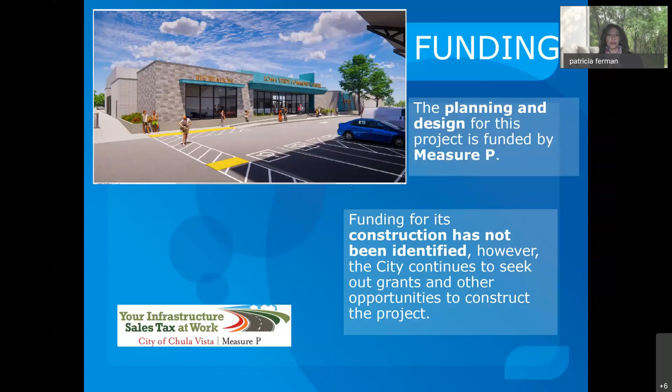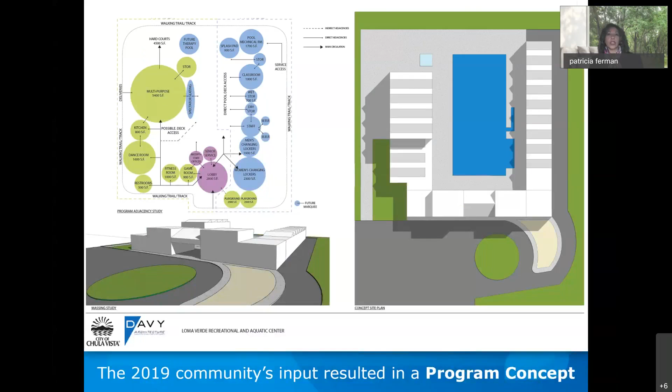In 2019, the city engaged the community through several meetings and also through a survey to obtain information from the community and work on a program concept. Through the different outreach efforts, a list of amenities was created and prioritized, and that was put together into this program concept.

Subsequently, the city entered into an agreement with EC Constructors to develop the program concept into a design. With the team, including EC Constructors and Davy Architecture, we presented the initial concept to the community.

We presented the schematic design to the community on July 27th of this year. We received really good input from the community. We had about 30 attendees, and they provided questions. We had about 18 questions, and we were able to answer those questions. The presentation was given in English and Spanish, and it has been posted on the Loma Verde webpage.

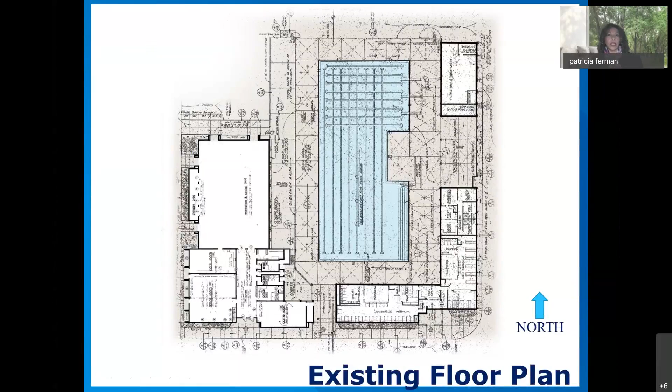Thank you, Patricia. I'm glad to join everyone tonight to talk about this exciting project for the community. What the screen's showing right now is the existing facility. You can kind of see the rec center on the left and the aquatic center on the right, and the pool in the center. One of the big goals of the community and the city, and I think especially the recreation staff, was to make this more of a community center rather than two separate facilities on the same site. So you'll see that was one of the big goals in the design process.

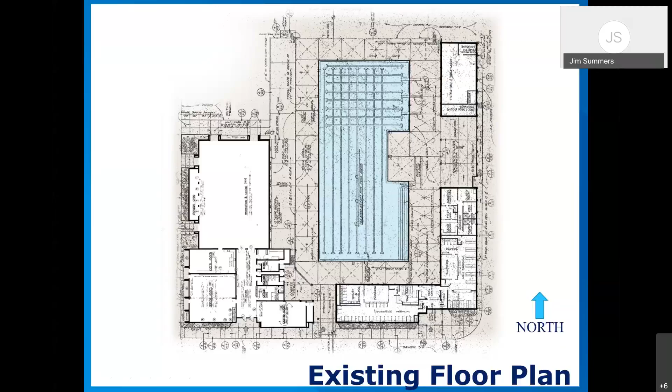Next page, please. So the city set this project up, I believe, for funding reasons into 3 segments. You see segment 1, which is the rec center portion, and then segment 2, which is part of the aquatic center area of the site. And then segment 3 is the pool itself and all the areas that support the operation of the pool, including the pool pump room and equipment room.

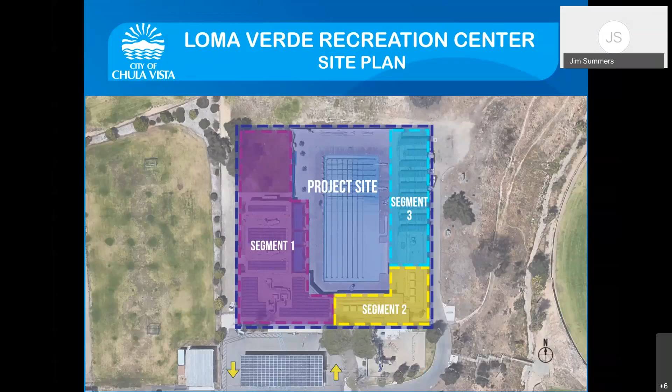So this is a concept of what the city could look at in the future for segment 3. We worked with city staff to lay this out to make sure that segments 1 and 2 that we're currently designing will work well with a future concept. This design is not part of our current contract, but it was needed to make sure everything flows and works effectively for the city's future build out of the whole project.

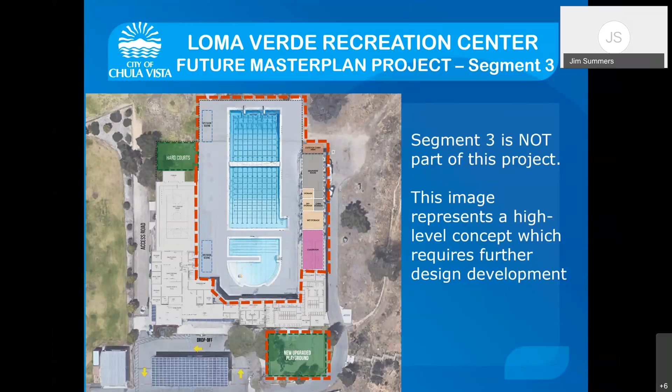Next slide, please. So this is an overall layout of segment 1 and 2. I think we're going to get into some more details of the design here. So I'm going to turn it over to Christie Jewett, our project architect.

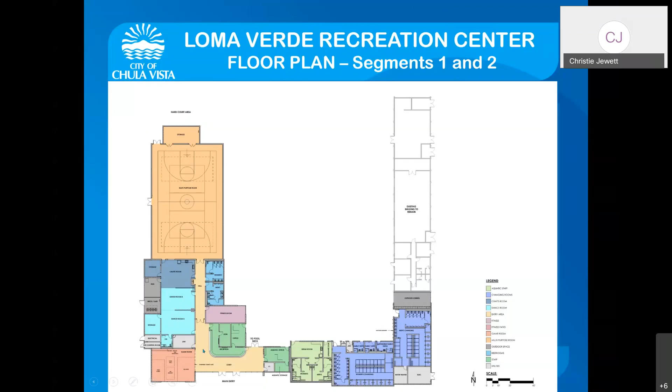Thanks, Jim, and thanks, Patricia. As Jim previously mentioned, we are focusing on segments 1 and 2, which is a brand new recreation center and aquatics facility, support facilities including the locker rooms and lifeguard area. The existing facility has two separate entries and requires staff to be spread throughout the facility to man those stations. So our overall concept is to make one central lobby and make it easier for staff to control the entrance points to the facility.

Next slide, please. Sorry, Patricia, do you want to put your slides back up? Sorry, I'm not seeing the slides. Okay, there we go. Can we go back one? I think we skipped.

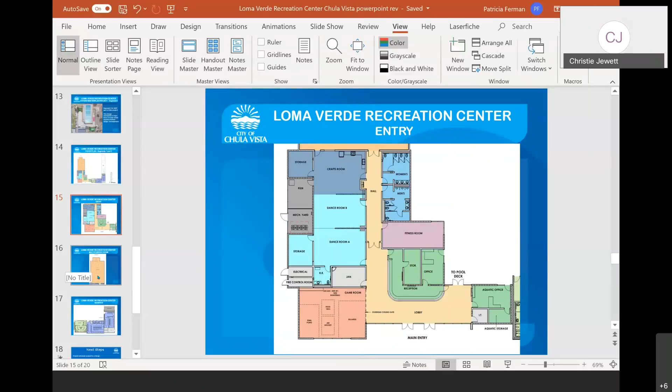Part of the program is a large multi-purpose room with full court basketball, volleyball, and a large storage area to support those spaces.

On this half of the facility, we will be constructing new women's and men's changing areas, large and intended for everyone to have privacy. We have family and accessible family dressing areas, as well as a lifeguard area with a break room, storage, and their own private facilities. There is also an area for outdoor cubbies, and the utilities, as you see in the bottom right corner.

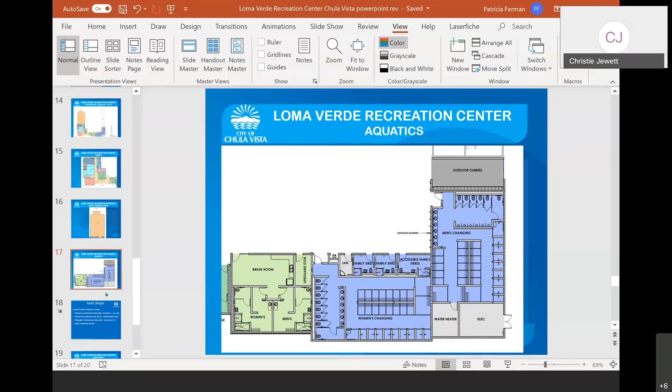I'll turn it back over to Patricia to discuss next steps. Thank you, Christie. So the next step is to present the design to the Parks and Rec Commission in January of this coming year, then subsequently present it to City Council for review and approval in February or March of 2021. If approved, we will move forward to the construction documents, finalizing those in June of 2021. After that, our hope is to continue seeking grant funding or other funding for construction of the project, and we feel having construction documents finalized will help us obtain other funding.

So, Christie, would you like to share your walkthrough?

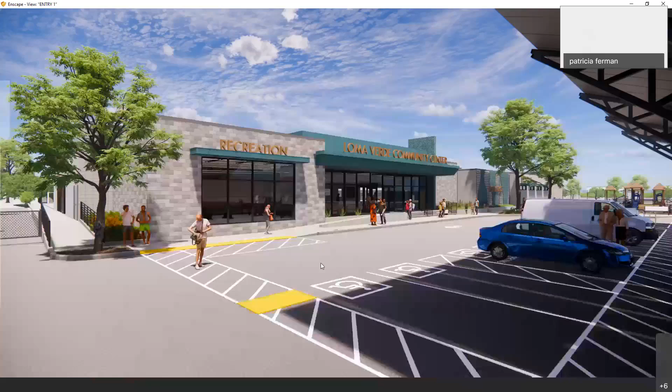Christie, we cannot hear you. Can you hear me now? Yes. Okay, sorry about that.

So this is a 3D walkthrough of our proposed concept. This is a working model, and the building will continue to be refined throughout our construction document process. We just wanted to give you a peek at the interior of the building, because we've focused a lot on showing renderings of the exterior, and we wanted to make sure everyone was aware of how the building is looking and feeling right now. I'm going to take you on a short tour of the exterior of the building.

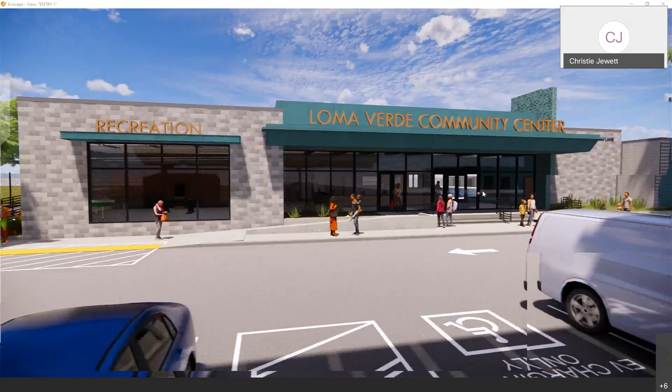So this is a great view of that single point of entry to the new facility. There is signage that designates which side is the recreation and which side is the aquatics. I'll just spin you around here. Very warm and welcoming, fun colors, lots of new landscaping, an accessible ramp in addition to the entry stairs. I'll back up a little bit so you can see the overall look from Loma Lane.

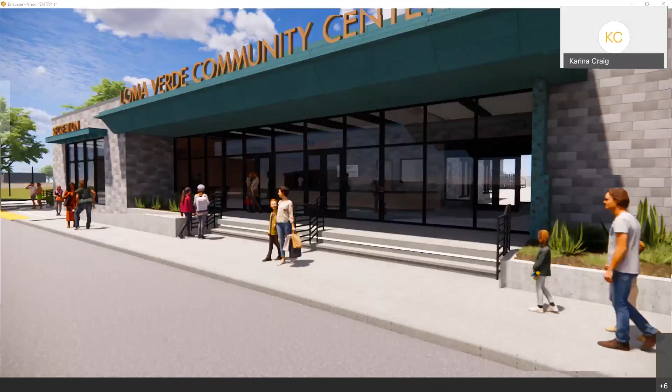And I'll start to head in. If Karina, you wanted to give a little background on the entry of the facility. Yeah, so the current facility has two separate entrances and lobbies for the recreation center and the pool. One of the most important changes to this new facility will be this centrally located entrance and lobby with access to both the recreation and aquatic amenities.

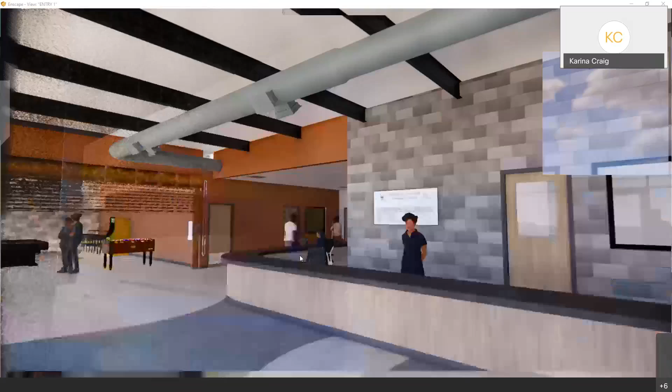The idea behind the new concept is having an intergenerational facility with ease of access and multi-use rooms that will serve all ages. We have the roundabout driveway that allows drop-off at the entrance, handicap parking near the entrance, this centrally located lobby, and multi-use rooms that can host a variety of classes from our youngest participants to our older generation. As we continue the walkthrough of the facility, you will notice all of these design elements in each area.

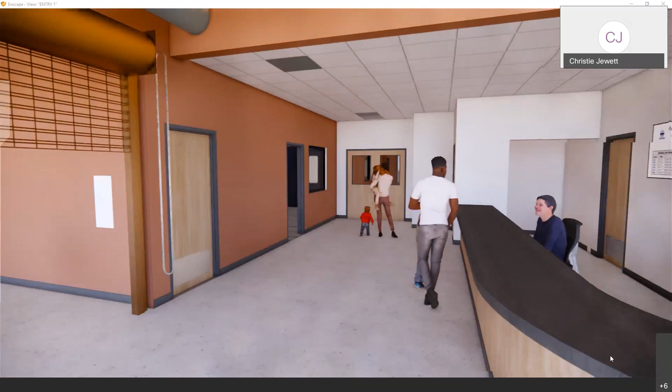As we're touring the facility, I'll point out some key areas. This is the game room with a variety of different games. As Karina was talking, I was showing a bit of this lobby area, with a welcoming reception desk and offices here and over here.

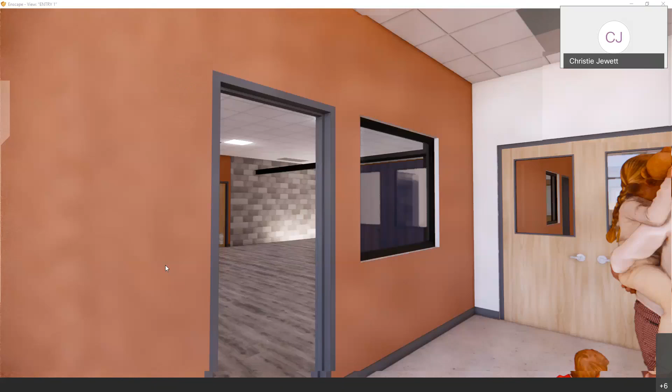I'll take you through the recreation side. In this room are the dance rooms I pointed out earlier. There are operable partitions, so this can either be one large room or divided into 3 separate spaces - dance room B, and over here is the crafts area, with room for tables and chairs, a kitchenette area, and a view into the multi-purpose room.

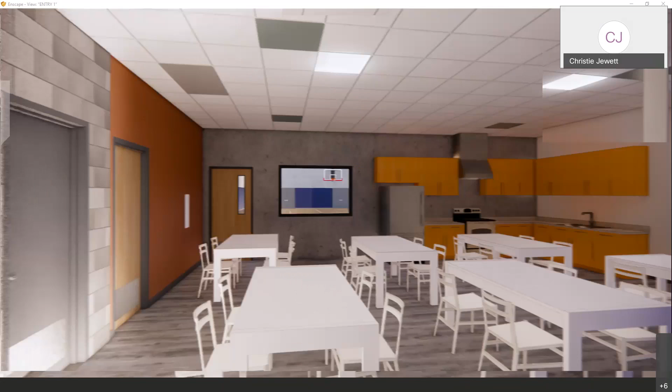We'll take a look in there - full court basketball and volleyball with wood sports flooring, mats surrounding the perimeter for safety, and you'll notice a lot of natural daylight coming in through the translucent clerestory windows.

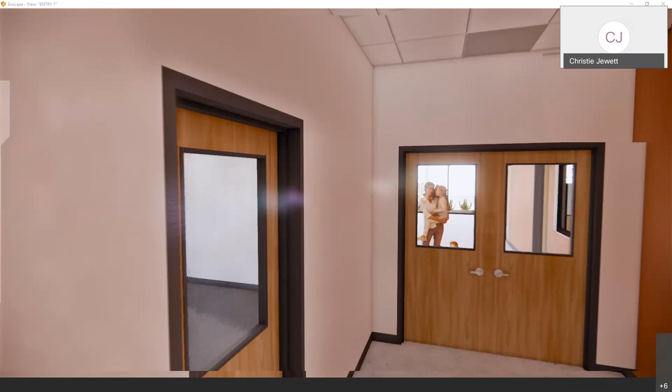I'll head back out into the aquatics area. As we're walking through the hallway, on the left here will be the men's and women's restrooms. And I'll take you through the fitness room here - this is the fitness area for different types of equipment or exercise areas.

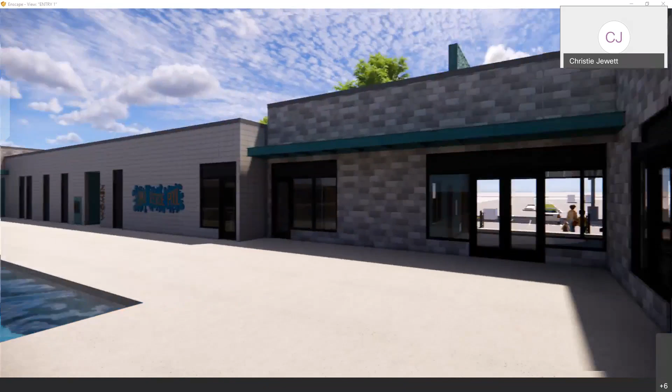We'll walk out onto the pool deck here. Back through this way is the lobby where we entered. Over here is the Aquatics Office, so we can peek in through the window here - there's space for a desk and a counter area for interacting with the public.

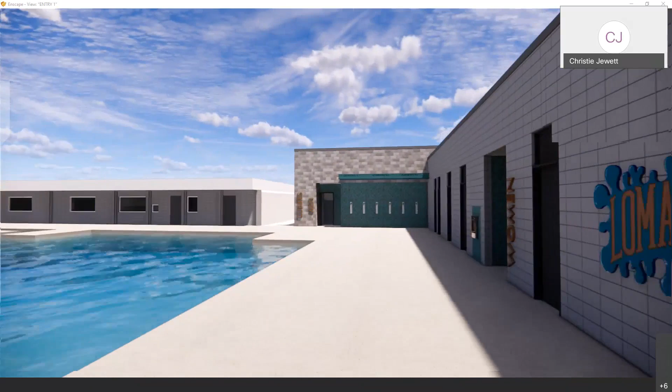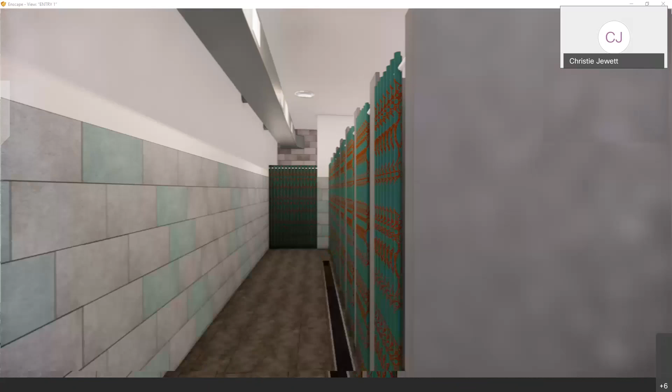Back out here, we can go into the women's changing area next. Through here is a private shower area, restroom facilities, and private changing areas in this section. The men's changing area is laid out very similarly.

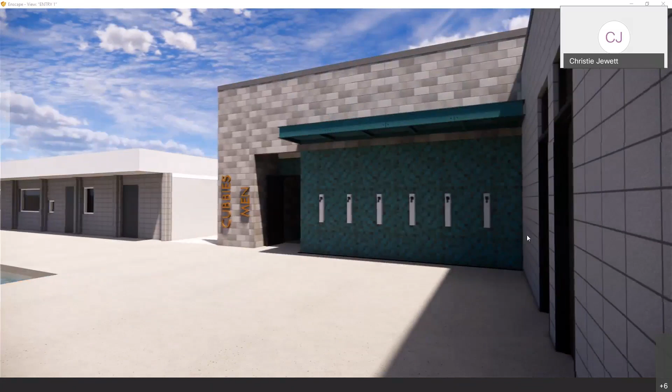Back on the pool deck here, we have an outdoor shower area, so there are opportunities for rinsing off inside the locker rooms or in this outdoor shower area. And then here is the cubby area for secure cubbies. I'll end with a little view from the pool here.

All right, I'll turn it back over to Patricia. Wow, this is amazing - thank you, Christie, for that amazing walkthrough. I definitely want to jump in the pool right now tonight.